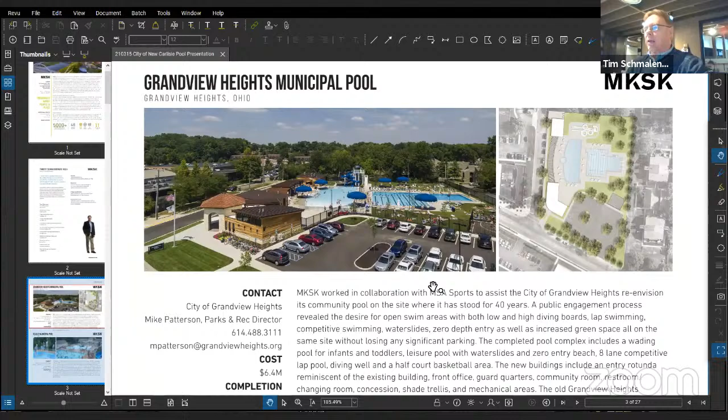Grandview Municipal Pool, because it's a smaller scale pool on a pretty tight site, only about a 2-acre site. Your site is about 3 acres from what I can tell. Now this was a complete rebuild of a pool complex. Their pool was leaking water at 3,000 gallons a day, so they finally had to pull the trigger to replace it.

We went through a public process, which most pools now we take through a public process so that you can get real input from the public. What is it that they desire in a new pool? That's the big effort these days, to do that public process.

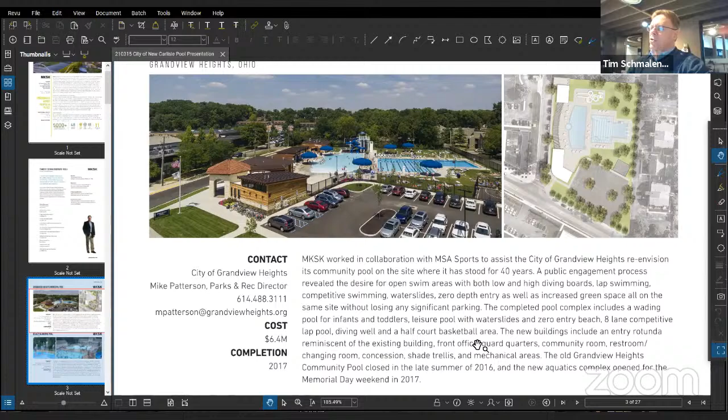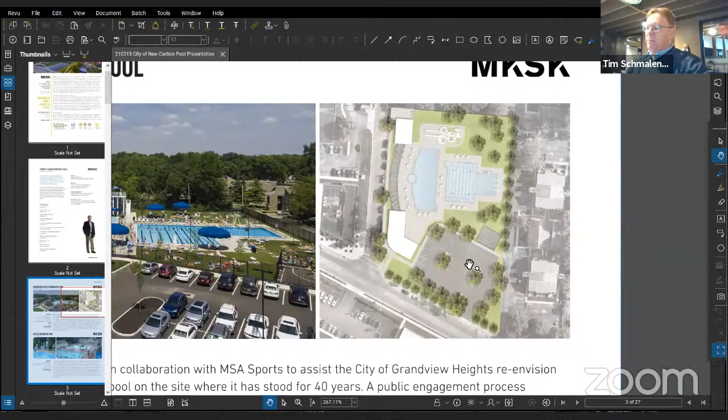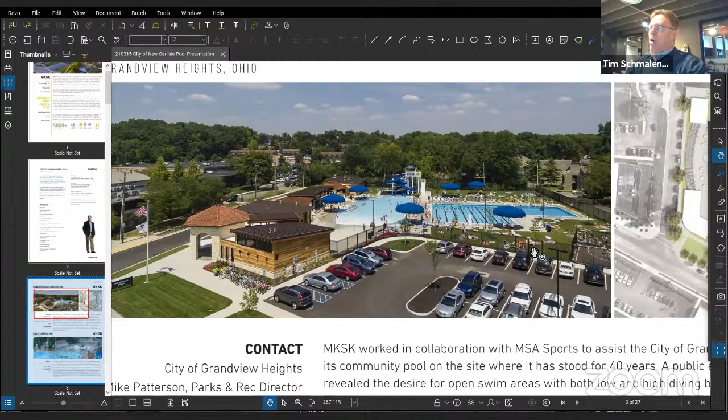You're obviously sharing concepts here. This is how the pool looked when it was being designed from a plan standpoint, how it fit onto the site. It was actually very close to that when it was implemented, as you look at the image here. This was all new buildings, new parking, new pool—basically everything wall to wall on the site. To give you an idea, this was completed in '17, and the cost was about 6.4 million. That was for everything.

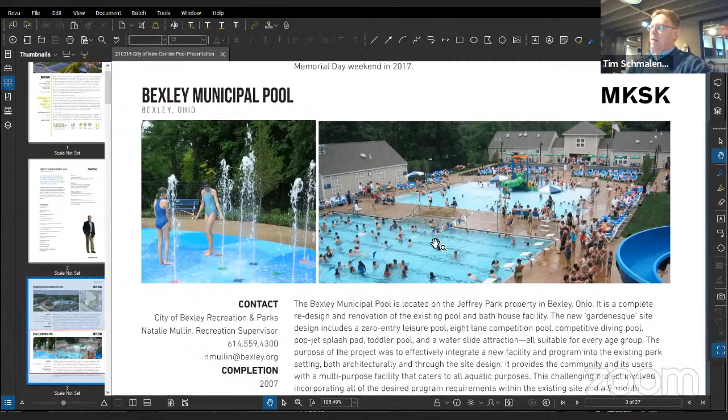The Bexley Pool, a suburb of Columbus, was a replacement as well. But what was nice is it was on a site that had a park around it, so you can see from the photos that the landscape around the pool was existing—like it had always been there, which is kind of nice. Whenever we have that opportunity, we try to work within that type of facility.

You'll get into that. I was asking Howie earlier about the existing site, and is it the thought to stay on the existing site or to look at other sites within the city, depending on what your long range plans may be.

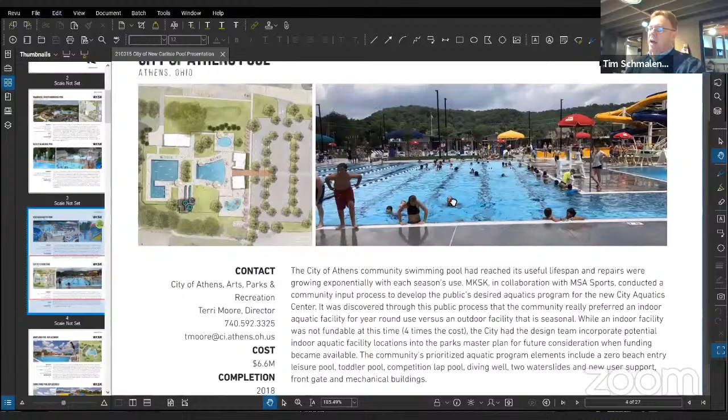City of Athens pool. This was completed in '18. This is relatively new—the City of Athens pool that I actually have expanded upon, and I'll show you the process that we took them through and some of the exhibits. But essentially, this pool was a complete replacement as well. The only issue is it was in a floodplain, so they were always at risk of having a river flow into the pool, thus contaminating the pool and damaging the equipment.

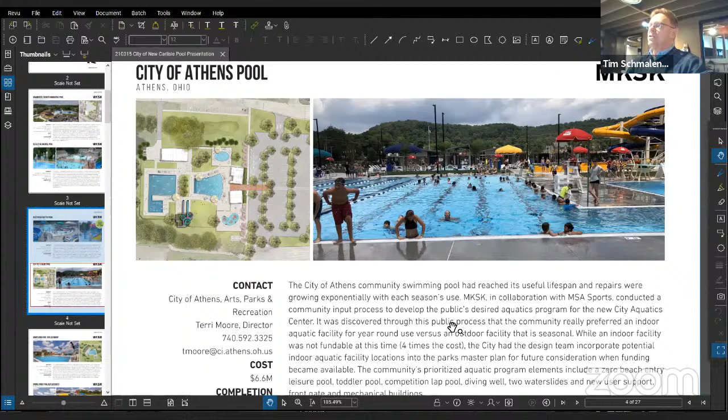So they wanted to raise the pool site, and we ended up raising it about 2.5 feet to get it out of the floodplain risk zone. And we'll share a little bit more of the public process on that because it was quite interesting.

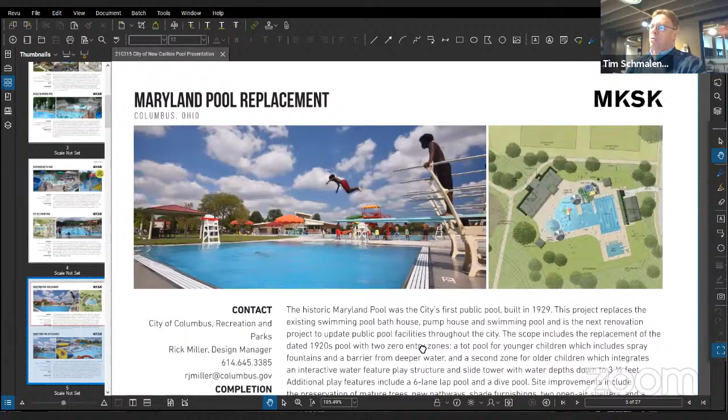These two pools, Maryland and Dodge Park, are very similar. They were two Columbus pools that Columbus got behind in their pool replacement and maintenance. They got to a point where they needed to replace about 5 pools in about a 4 to 6 year time frame. They were all over 40 to 50 years old and having a lot of issues.

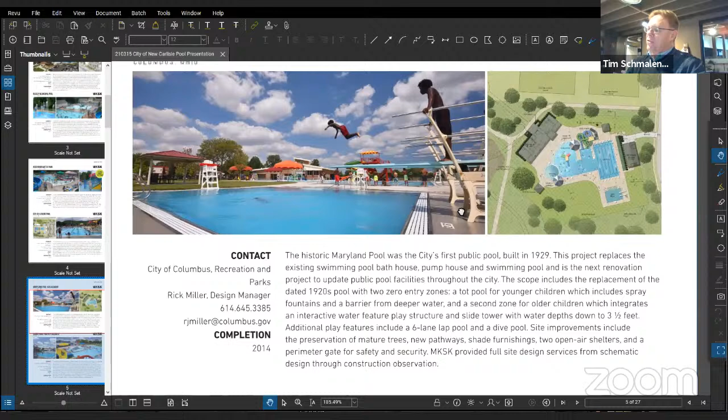This particular pool site was one of the first pools ever built in Columbus, and I had to chuckle when we dug back into history. They built this first pool back in the early 1900s for roughly $5,000, I think, when we looked it up in the historical information. But needless to say, this pool cost a little more. Again, you can see the various shapes and program elements on these pools.

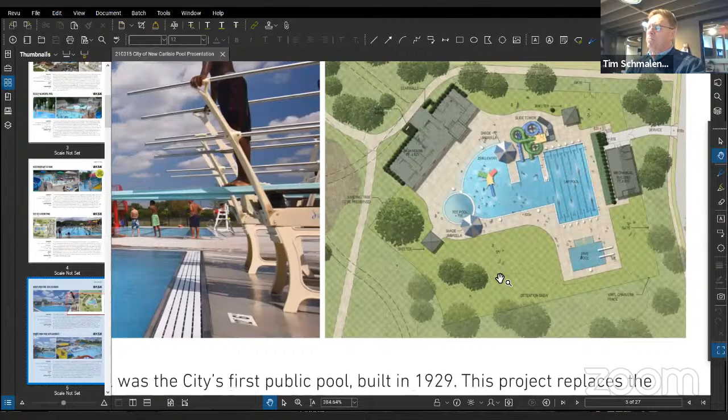They're pretty much dictated by what the public is after. We work with an aquatics consultant, the actual pool engineer, to get the pool engineered and sized for budget, et cetera. Each of these teams has an architect involved for the buildings, and engineers on the team to handle drainage, utilities, et cetera. So we can lead or we can be a sub — we've done it in a number of different ways. It just depends on what's best for the client and what they're trying to achieve.

Because you can end up with less water, there's less maintenance for the pools, and also less to construct them — but they're highly crafted to the users. You can see lap lanes for competition swimming, open swimming, a young children's area with a play piece in the water, slides that drop into a splash pool, and the diving wells separated out, shown on the left. The reason diving wells tend to be separate now is that the bottom transition from a deep area to the shallower areas eats up pool space — it's too deep to stand, it's sloping, and it's water that isn't highly programmed, so you end up maintaining that part of the pool with little use. When you separate the dive well, you avoid those transitions per the Ohio Board of Health code, so you can spend usable water elsewhere. That makes your pools overall smaller than the pools of 40 or 50 years ago.

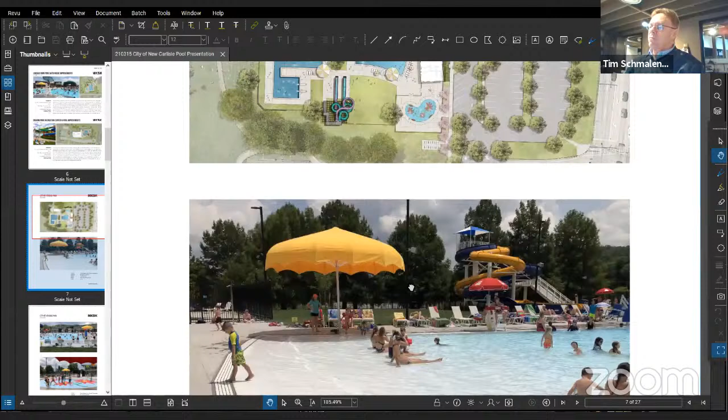Here's a closer look into the detail of the Athens pool. I'm going to blow through some of these features of pools these days, just to give you an idea.

Shade is big — shade in the water is becoming bigger. You can see these large umbrellas close to the pool, so a mom or dad can get a young child in the water but still be in the shade, not burn up in the sun. This is also a zero beach — you can see how the water laps up like a beach, and a lot of people like to sit in the water at whatever depth they want as it goes down. These are a very popular feature of new pools these days.

Then there's the open recreation area for swimming, cooling off, sitting against the wall — sometimes there are seat benches built into the pool. Another feature you're seeing is spray zones with no standing water. Most pools run from Memorial Day to Labor Day, but it's hot before and after that. So at Athens Pool, they wanted a cooling-off zone, which we made into a spray zone. Since there's no standing water, there's no need to lifeguard it. We fenced it so that during the pool season it's only open to the pool, but there are gates to the right of the photo that open to the adjacent park. So when the pool closes for the year, the public can use the spray zone for free to cool off — usually the month before the pool opens and the month after. They found that to be a nice feature.

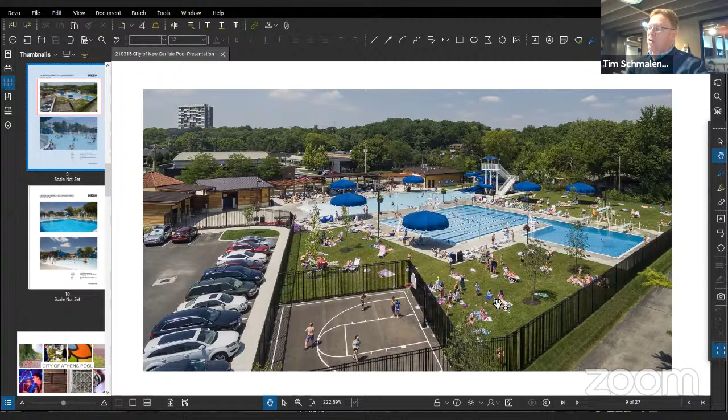A lot of the features were wrapped into this. This pool had an attached tot play area, just here to the left. For the toddlers, the community didn't want them separated by a toddler pool behind its own fence, etc. They wanted it really attached to the main pool. So there's a bench on the main pool, and inside the toddlers can be with their parents or play on their own, but not get access to the large pool. This actually works out pretty well.

This is also filtered on a separate system, right? Because accidents happen with toddlers, and you don't want those accidents taking down your main pool. So that's why you see it separated. It looks like it's the same water, but it's really a whole separate system within that.

This here is their zero beach. It had some geysers in it, kind of almost like a water park, just to give it a little more activity from that end. And then their dive well—this is the other way you can handle a dive well. We didn't want a separate system for the dive well, so we connected it with a small transition piece of water here, not the whole length of the pool, just this small transition piece. So that odd depth of water is only in this area here, and that's how they chose to do it.

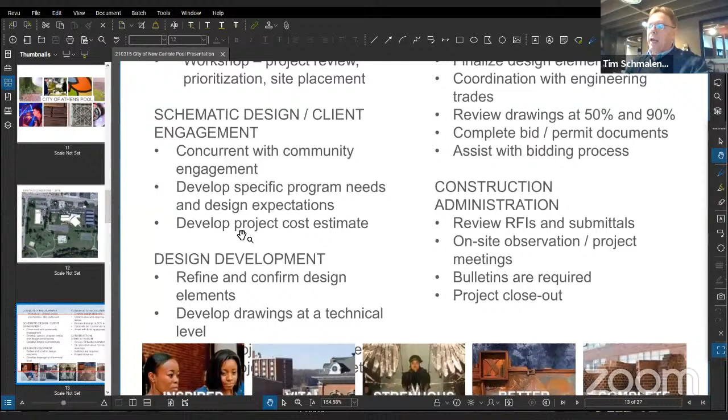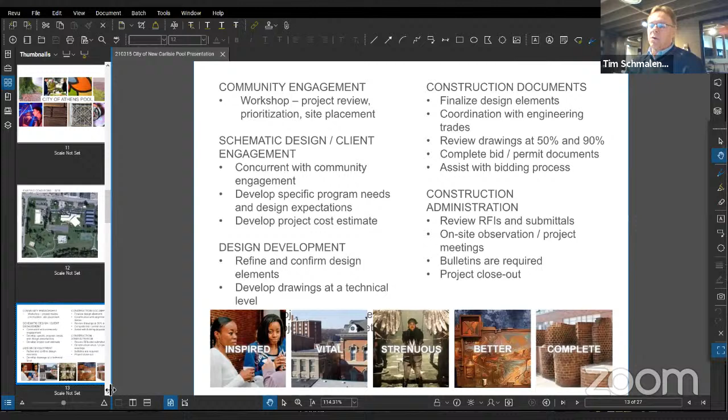There's a community engagement process. These are kind of the process broken down into essentially five categories: community engagement, schematic design, client engagement, design development, construction documents, and then construction administration, where essentially you build the project after you get it bid out. Then these were basically the goals and programs that came out of the public meeting, boiled down into about 10 to 12 bullet points. This is what everything was measured against as we went forward.

Diving, lap lane considerations. Swim teams are a big voice, but what we have to watch out for is the public. They're not as organized as a swim team, right?

So the voices of the swim teams may seem louder, when in reality it's usually the public that are the bigger users, for summertime use, from that end.

And so we try and work that out through the whole public process. We obviously talk through depth considerations by age groups. The depth of the pool is driven a lot by the age group uses.

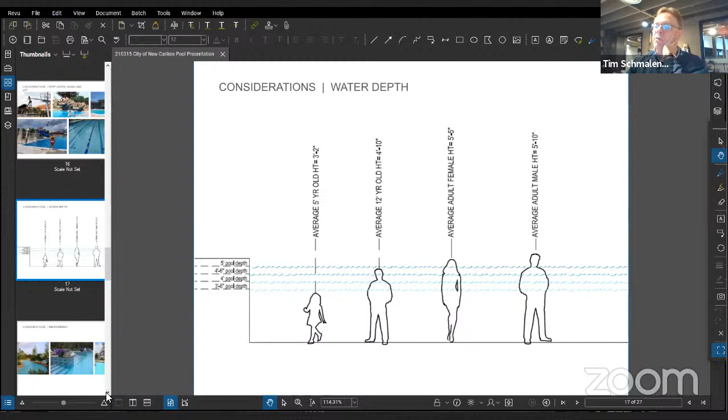And then if you want to go a little more adventure, you can take some part of the pool and have climbing walls, either temporary or permanent, that utilize the deep end of the pool or the dive well, switching off by its use—diving for a while, climbing for a while, etc.

Then there's also the float toys and cargo nets that you can hang on to, so it's kind of a challenge course to get across the pool, from that end.

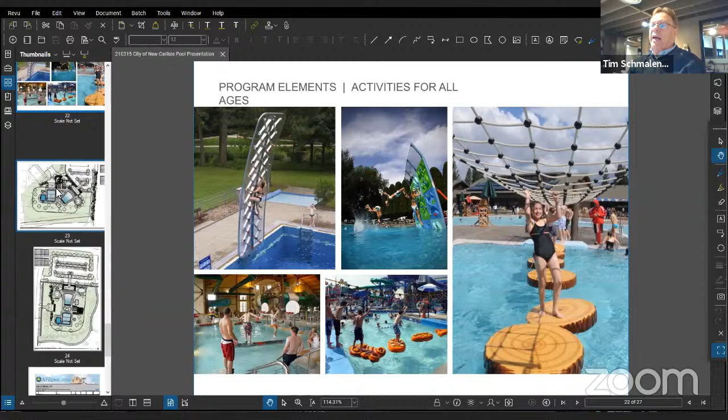So these were all elements that, for Athens, were high on their list. And there were two sites within the project—one was to the east.

the east side of the rec center, a whole new site. And this is what that configuration looked like, because they could utilize an existing parking lot, which helped save them dollars from that.

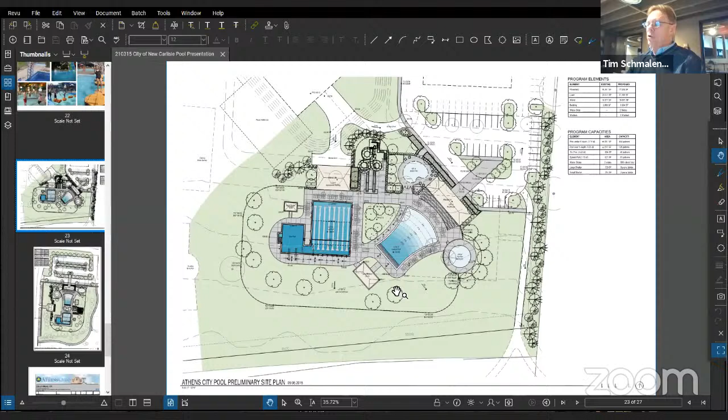But this site, we would have had to fill more to be able to get the pool up out of the floodplain.

Option two was utilizing the existing site where the pool was at, but still raising it. But we only had to raise it about 2.5 feet to make it safe from the flood prone zone.

And in the end, this ended up being the more cost-effective solution, so the city chose this direction on it.

And you can see, this isn't really exactly what got built, but it's darn close. The pool dive well actually got flipped 180 degrees. The zero beach is about right, the splash zone's about right, and the lap pool's about right from that.

But from this point forward, council said yes, we like this one based on the costs. And here were the costs.

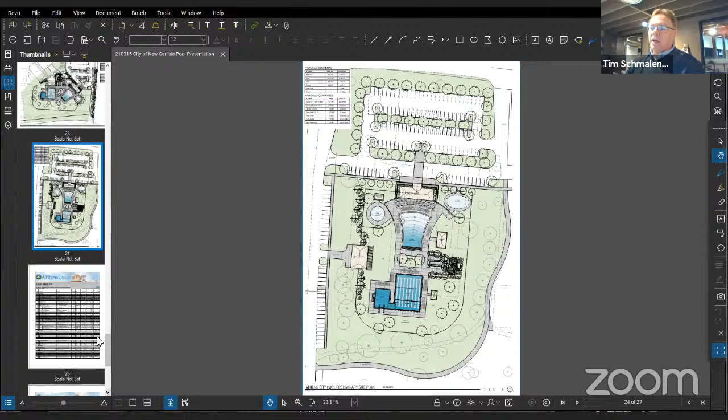And if you kind of zoom in, this is a pretty detailed estimate where we go through and talk about demolition, grading, right?

We treat it, even though it's at a schematic level, like we're trying to read into the estimate to make sure that we're covering everything that we know of on it.

So the aquatics are broken down. And for instance, when I was talking to Howie earlier today, your current pool is roughly 8,200 square feet. If you were to replace that in today's dollars, depending on what's in it,

it would be somewhere between about 1.25 and about 1.4 to replace that pool, completely, based on today's dollars.

And so that's the pool and the equipment. But that's not the buildings, that's not the deck, that's not the site—that's just the straight pool.

Applying that kind of $165 a square foot of water surface area is what we found over the last 5 years or so. Tends to be a good average for the pool.

So that's why you have to estimate all the other elements that are illustrated in this early SD estimate. I'd forgotten that at that point early in the process, SD had estimated about 6.5 million on it.

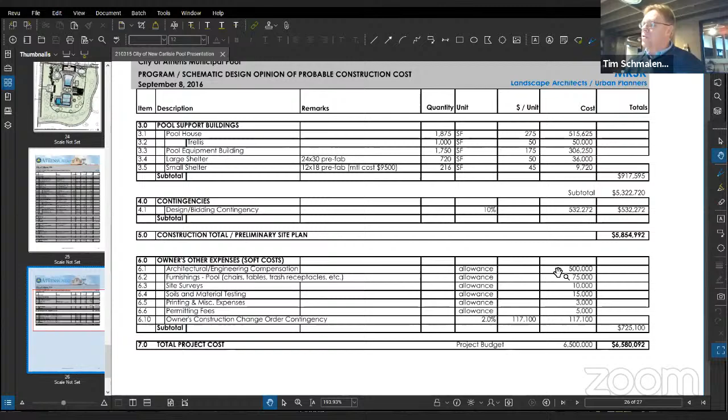The project actually came in about right at 6.6 million. Now the city added a little more program from the SD phase going forward. They wanted some other features on the site, and that added about 100 grand to it. But we're pretty confident that we can be pretty accurate early in the process on it.

You can also flip over to your pool now here. I think I have to share out to another screen. You're not seeing it? Let's see here. Oh, hang on. Can you guys see the aerial of your pool? No? Okay, let me stop the share and go back in again and pick the next one, and it should pop up now. Are you seeing your pool? Yes. Okay, great.

So when I was talking to Howie earlier, he said that you guys had just put some work into the bathhouse a couple years ago. So you may be doing your pool, keeping your bathhouse, and doing a new mechanical area, right? You can certainly piece this out in parts.

We did a project for the city of Columbus where their bathhouse was falling down, but their pool still had about 5 years on it. So we went in and replaced the bathhouse. We master planned for the future pool based on the information they had at the time, and located the bathhouse in its future location to accommodate the future pool, because they moved some things around, but it would also continue to work for the current pool.